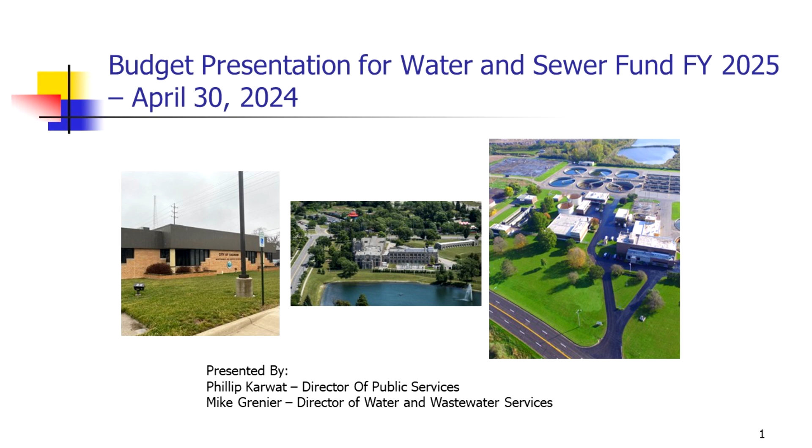Let's start with sewer, Fund 590. Right now we're anticipating revenues of $38,283,207 with corresponding expenditures. These expenditures tie back to our rate study. Everything in this presentation ties back to that rate study. Our spending plans, spend down plans, and capital spending have all been baked into the rate study, so nothing we're talking about today is going to be driving a rate increase.

Just to talk about the treatment plants and the water and sewer services division: the treatment plant has a capacity of 35 million gallons a day. Of that, 7.2 million gallons are in-household, and about 10.3 million gallons is industrial/commercial. Because we're a combined sewer system, we have 7.5 million gallons of stormwater coming into our system, for a total of right around 25 million gallons we're seeing every day.

Besides the sewer treatment plant, we also have 7 retention basins. These RTBs are used to treat stormwater when we have a large rain event, letting us treat it before it hits the river. Otherwise, we don't have the capacity in our treatment plant, which is why we have those. When you have an event with over an inch of rain in a day, you can figure those RTBs are going to be moving.

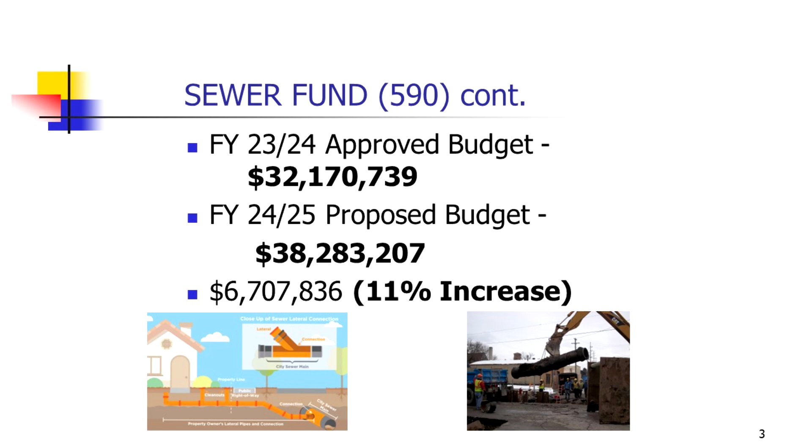Here's your breakdown of the different divisions inside the sewer fund. You're looking at engineering and administration, under Phil Karwat's side of the house, public services; meter maintenance and service, the folks fixing the lines; catch basin cleaning, a whole separate crew cleaning catch basins; and utility billing. On the water and sewer services side, you have administration, that's myself and my group, and process controls, the folks running the computers that actually run our systems.

Treatment and pumping are the folks actually treating the water when it gets to the plant. We have a small asset management division, someone helping us keep track of everything we have and making sure we're taking care of it. Remote facilities are those RTBs I was talking about. The surplus division doesn't have any people, but that's where all the money hides—that's where we do our construction from.

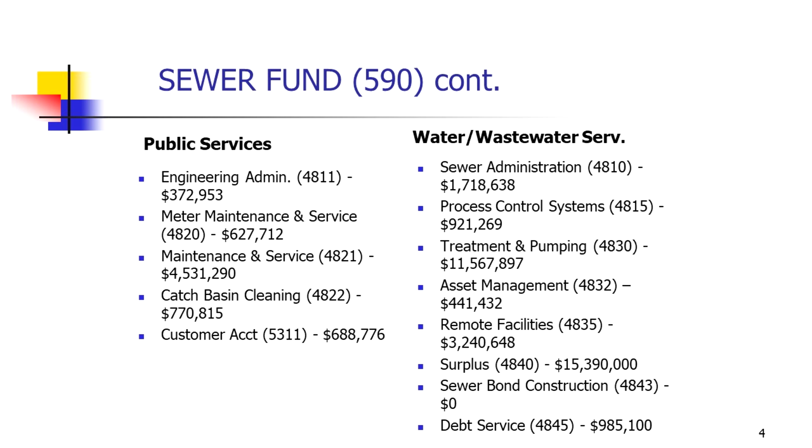A little bit from bonds that we're not using this year, and then we have to spend some money to pay off our bonds, which you'll see on the last one. So there's 13 different divisions. We're all different, but we all work together, whether we like it or not.

We all have to spend out of the same pie, so we're talking a lot. I'm going to walk through a couple of the major purchases, big projects that you're going to see inside the budget. All of this is enumerated out. I'm just going to go ahead and pull forward some of the large stuff. So under vehicles and large equipment purchases, you're at about $350,000 this year.

Most of these monies are all split between water and sewer, so I'm not going to duplicate myself. I'm just going to go ahead and list them here, and then you won't see them again on the water side, but all of these purchases are split 50-50. That's a couple of 3/4 ton pickup trucks, a new dump truck, replacing one of the regular vehicles, a new Cat excavator, a hydraulic sweeper, and a big air compressor. So those are the big ones.

And then through each of the individual divisions, you'd be looking at engineering. They're looking at $20,000 to test materials, to test the asphalt, to make sure the concrete's slumping correct.

Process control right now, most of their big costs are all tied up in supporting the software that we have. So that's contracts for our SCADA system, which is what runs the plant, or the contracts for our software for meter reading, and then some of those software needs.

Meter reading, they're paying a bunch for new meters as they replace their meters, their smart portals. Maintenance and service, it really gets down to parts -- the things they need to make road patches, asphalt, professional services, and then cleaning and televising. Those are some of their large number items.

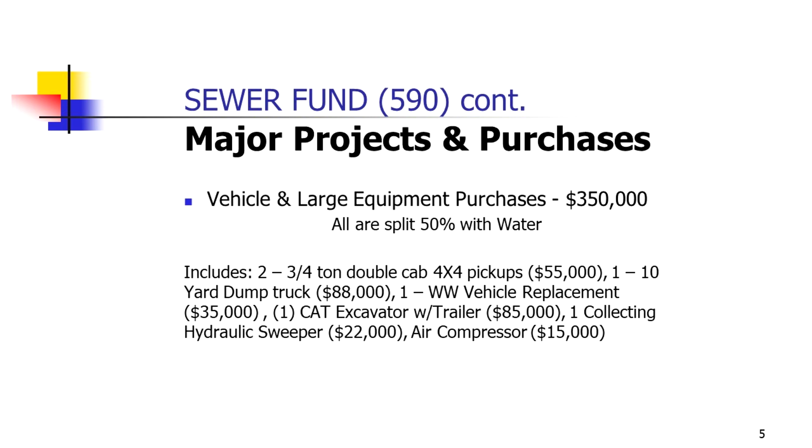I'll talk about some of the sewer projects related to road work. We've got a large project on Jefferson from Hoyt to Janes, a project on Sheridan from Treanor to Hess, 17th Street from Walnut to Janes, South Wheeler Street from West Michigan to Gratiot, Hess Avenue from Jefferson to Sheridan, and then the Adams and Cass Street from Michigan to Niagara.

And this just lists out some of the major road projects. As we're doing these road projects, it's not just us saying, okay, the sewer's fine -- that's replacing all the catch basins, making sure all the appurtenances and other doodads that go on the pipes are replaced, so that we can do this all in one fell swoop and don't have to come back three years later and clean up and poke holes in a nice shiny new road.

Things some of those other divisions are working on through that is they're televising those lines before we do anything with them. Some we just have to line, some we just have to clean, they're fine. But we've got to get out there and know what's going on.

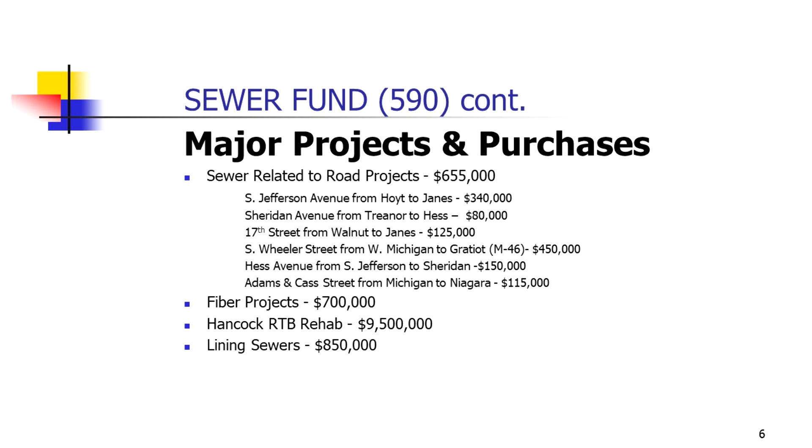Talk about some items that either I want to highlight or things that we're looking down the road, because while this is the FY25 budget, we're looking out 5 to 7 years and even longer than that on what do we need to be doing, how do we need to set the system up to make it better and be smart about using the people of Saginaw's money.

So right now I've got a $400 million state revolving fund ask that was just submitted to the state of Michigan.

We're wondering what will happen if we actually get all that money, because it will put a little bit of push on staff, but it's a risk I'm willing to take. With all these projects coming up and all the different bonding and granting opportunities we have, our capital project list is going to be a little bit fluid right now. I'm not a big fan of ambiguity, but the ability to get free or very reduced cost money from the state or federal government is going to necessitate us being flexible on how we arrange our projects, and I just need you to know that we're looking at all of this.

The other big item on our list is our RTBs. They need work. We've had those evaluated by engineers, and we're going to go deeper dives into that. There's going to be significant work on those remote treatment basins as we move forward.

As I've mentioned, we're seeking funding from congressional earmark requests and the state revolving fund projects. We've retained some consultant engineering firms to help us with those requests. Just to claim one win while we're here, we went ahead and received $500,000 towards planning. We were awarded a planning grant, and you're going to see us use those monies to look at some things on the water side, and we're working hard on the sewer side the same way.

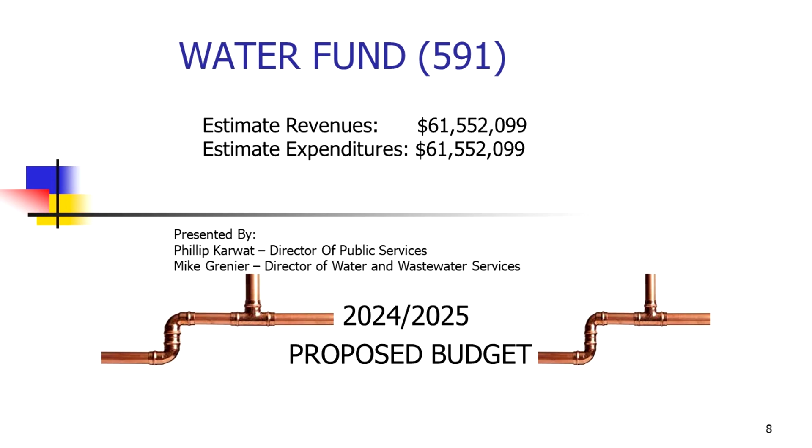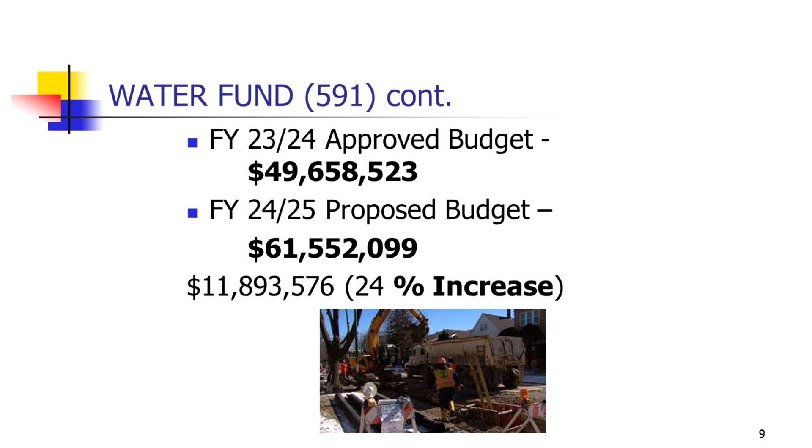Continuing on to the fund again, in FY 23-24 it was just over $49 million. This year we're coming in at 61 - a 24% increase, almost $12 million. But again, this is planned and should not have an impact on rates. We're going to be able to do a lot of capital improvements to the system, which needs it. This is planned, and people have done a good job to make sure this happens.

I'll walk through some of the different divisions inside of the water fund. On the public service side, cross connections - those are the folks doing investigations out in the system to make sure nothing bad is coming in from the pipe side of things. Engineering and administration, meter maintenance - those are the folks putting in new meters, checking meters, making sure we can bill so we can pay for what we have to do. Maintenance and service - those are your folks digging up the pipes, replacing lines.

And then there's our newer division, line replacement. This division is about 6 years old now, and that comes out of a mandate from the state of Michigan that we have to replace every lead service line in the next 20 years.

So we brought on a crew of folks to do that, and over 4,000 lines have already been replaced, either by our crews or contractors. I'll talk a little bit more about lead here in a minute and where we're at on that.

Inside those divisions is our accounting, so customer billing. On the water and wastewater side, you have administration, process controls, those are your computer people. Treatment and pumping, that's your treatment plant. Somebody to keep an eye on the assets. Raw water, that's the money we send up to Whitestone to make sure we've got raw water as part of the water corporation.

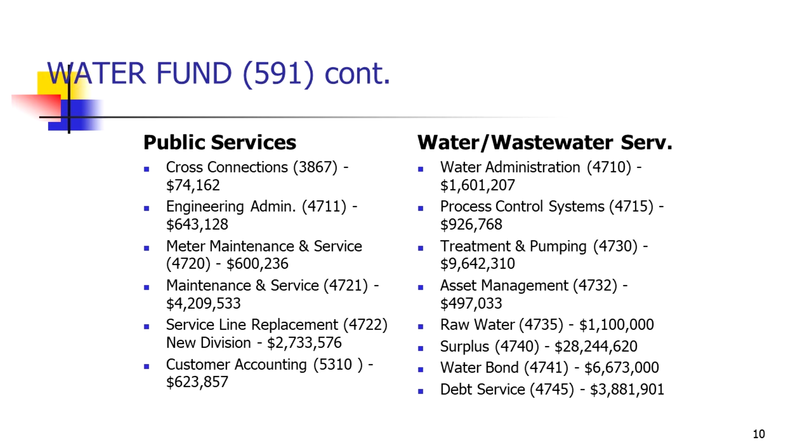Most of the surplus is where the big money's coming out of. It's $28 million this year, and a little bit from bonds and paying off our other bonds.

Let's break down some of the major purchases coming out of the water fund. As I talked about earlier, the purchases you saw on the sewer side are split 50-50. These are the only ones that are not, and that's a new pickup truck for the water plant along with a new mower. The rest are split 50-50 with sewer.

Other major projects are going on, and again you're not going to see me talk a lot about road projects because those are covered at the same time with those sewer projects. Right now I've got almost $35 million worth of capital projects that we're going for. There's a water tower that right now we're estimating at $18 million.

Birch Run parallel pipe, $2.4 million. Improvements at the treatment plant, $1 million. We're getting ready to let the bids out to replace the electrical switch gear at the water treatment plant, which speaks to reliability. That's looking to be right around a $6 million project.

We'll be continuing year 2 of working on the masonry and the roofs at the water treatment plant. It's a beautiful old building, but a beautiful old building needs work, so we've got crews that'll be up there to make sure we're taking care of that.

Along with that, you'll be seeing lead service line work because of the grant we received. That's a 3-year grant for $5 million. It's almost $1.7 million worth of lead service line replacement work that we're doing, and that's contracted work and work that our own crews are doing, and we're able to charge both of those against that grant.

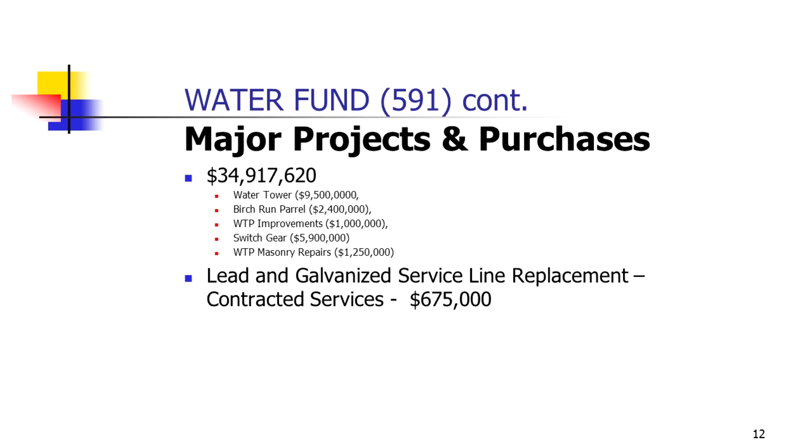Road projects, the water department's going to participate in all of those. Those are listed on the other page as well, so I'm not going to walk you through those, but again it gets into the same thing we're doing on the sewer side. We're making sure the hydrants are replaced, all the valve boxes get replaced, so that when we're done with the road, we're done with the road. That's a big focus of the department.

It helps save everybody a lot of money that way.

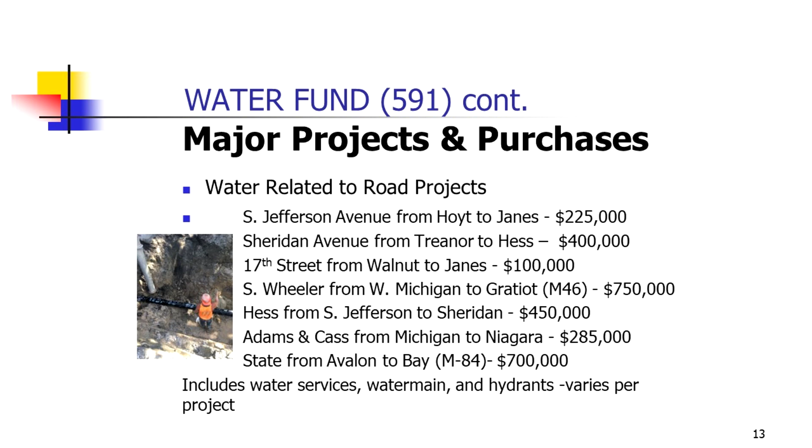I'd like to talk a little bit about the lead service lines. Council will be receiving a report here in the next month or so on where we are and a big breakdown of our lead service lines. I'm not going to go too deep into it, but after the Flint water crisis, the state of Michigan mandated that we replace all our lead service lines. Right now we're estimating that to be a total cost of $50 million.

So far we've received $5 million from the state revolving fund to help replace those, along with the funds from that $6 service charge on everybody's bill. As we receive those funds, we're actively seeking more money. We're asking for another 3 years on that SRF loan right now. As we can stack those monies, we'll try to replace more service lines.

The other thing we have to do as part of this work is inventory our lines. Saginaw did something I think was a really good idea. There are two ways to catalog your service lines. You can do a sample and then a tighter estimate, or you can go out and pothole every service line in your city and know exactly what's in the ground. That's what Saginaw chose to do a couple years ago, and it's paying off for us.

Right now, the Maintenance and Service Division has identified 4,633 lead service lines, over 20,000 non-lead service lines, and that only leaves us 3,000 service lines to verify before October. October of '24 is our deadline to have that inventory completed.

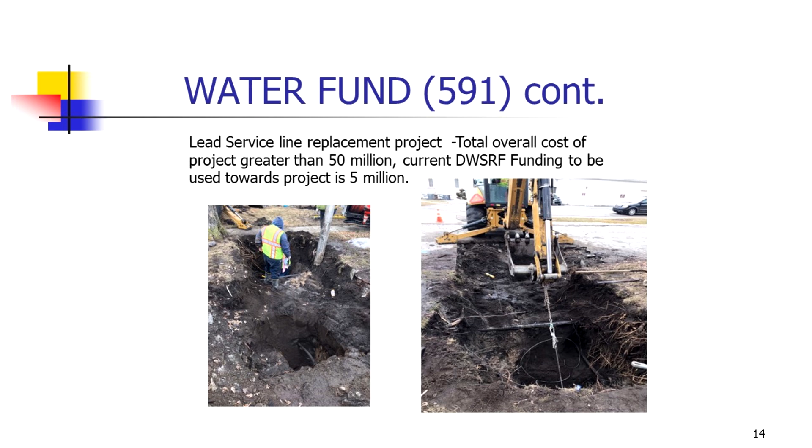A little bit of what's going on at the treatment plant. One of the big studies going on there was to optimize how well we're treating. Are we treating for lead the right way we're supposed to? Right now there's a loop study going on where we dug out lead service lines from our system that have been exposed to our water. Those are now mounted inside the treatment plant, and we're running different treatment chemicals through those service lines. This is part of a $200,000 study we entered into with Fishbeck Engineering to look at that.

Are we doing the right thing for treatment? This study is going to take at least another year to complete, but that's one of the things we're studying. We received that $500,000 grant that's going to help us study what the future of the treatment plant should look like. A big, beautiful old building, but it's time for some work. What should we be working on? Which direction should we be going?

We need to provide a little more service going west to our service area. How do we go about that? What's the best way for us to do that? We're due for a reliability study, so we're going to have that taken care of out of this grant. And then, like any good engineering firm, we were able to score money to look for more money.

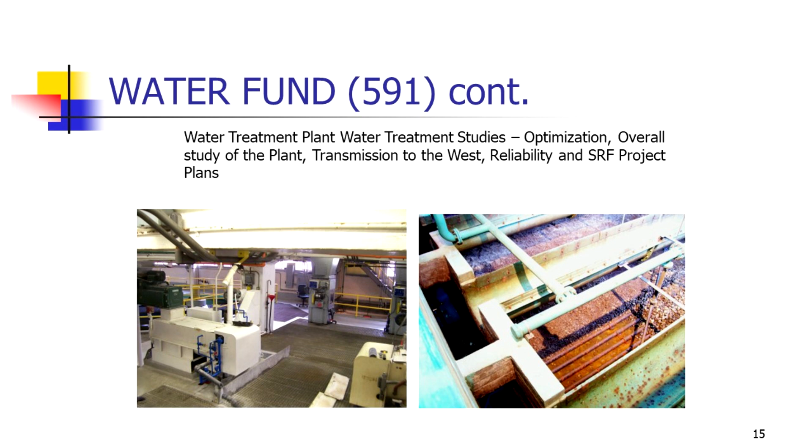The big project on tap for this year is currently out for bid. We had our first pre-bid meeting last week. There are primarily two tank companies in the country, and both were here to bid on this job. We're estimating that water tower is going to come in at $18.5 million, and we're going to be building a 3 million gallon tank.

We'll get a lot of questions on, well, why do you need a tank now? You've been running for almost 100 years without one. It's because stuff happens.

And then particularly with the electrical deregulation that's coming down the pipe, we're losing the big power plants. So if you have distributed generation, you'll also have distributed risk. Right now we've got 5 minutes, 8 minutes, 2 minutes, depending on how much water we're pumping that day, to get our backup generation on if we lose power.

By putting in this tank, we'll basically buy ourselves 2 to 3 hours. If you lose pumping, which is the case right now, you'd have those 2 to 5 minutes before you have to go into a boil water notice. By building this elevated tank, it buys you, me, and my staff the time we need to figure out what's going on so we're not in that situation.

We received $15 million from the state revolving funds as forgivable loans, which means free money for us to go ahead and build this tower, with the remaining funds to be taken out of surplus.

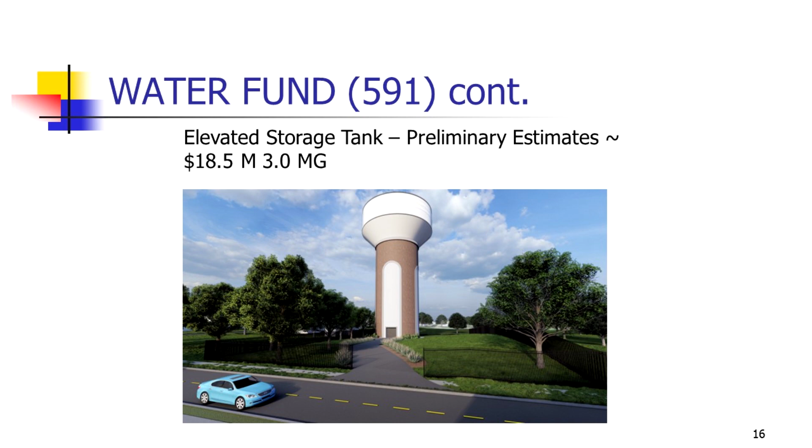Just some pictures of some of the things we're up to. As I said, this was the end of phase 1 of the work at the treatment plant, so you saw a lot of scaffolding around. That was actually to protect people because some of the bricks were loose and falling. But they were able to get up there and do all that masonry replacement work with the correct type of mortars so we can keep this building around for a while.

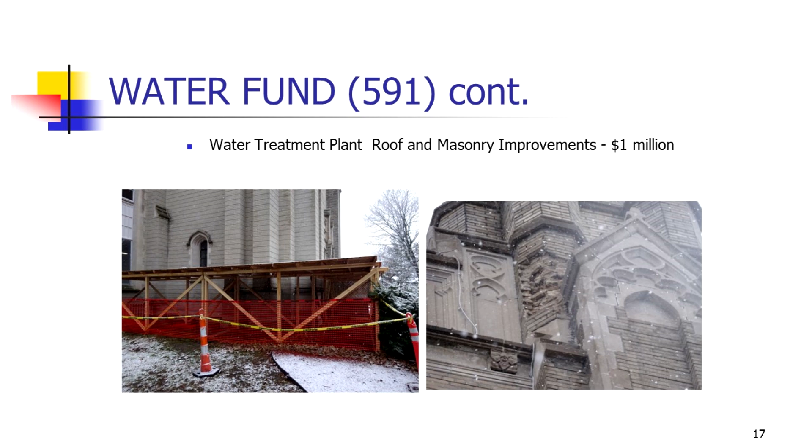So we're into phase 2. That's another $1 million, plus we'll be looking at a new roof on some of the facility as well.

Some future projects for you guys to be aware of. We'll be looking at our raw water transmission. That's probably the weakest point in the treatment system, after the tower. There's a section coming down from Whitestone that only has one pipe, and if you have one point of failure, that's not necessarily the best thing in the world. We'll be looking at what we want to do with that - is that putting in another line, or rearranging some things and borrowing a different line? We'll have a study going out on that.

We'll also look at our finished water transmission, since those two kind of correlate together. And we're going to be looking at the treatment plant itself - it's been in service for 95 years. What do we need to do for it, and what puts Saginaw in the best position going forward with their drinking water. There's also some other things, distribution improvements and lead service line improvements.

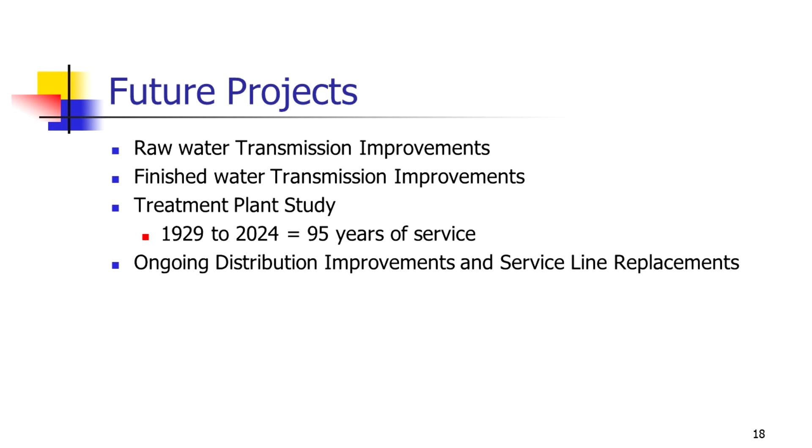Just to talk a bit about how we actually decide what to tell you we need to spend money on - it gets down to level of service. How old are our assets? What is a failure rate that's acceptable? Do we have redundancy? When I talk about that single raw service line, or about building that water tower, those are things that build redundancy for us.

Because my whole goal in life, your goal as a council, and the good people of Saginaw's goal, is that you turn on the tap, water always comes out, you flush the toilet, it always goes away. So that's what we're always focused on - pressurizing and protecting the system, which gets into pressures, chlorine residuals, and cross-connection inspections. Those are things we do because we have to protect the water system. And then every decision we make is viewed through a funding lens.

Everyone that works in our system, and everybody here on this council, is very well aware that anything we do to water rates impacts our customers. So we're looking at costs - is that benefit we get worth the cost? We just took one of those items off the table that way.

We had been looking at maybe adding a second sewer line across the river. Well, we looked at the cost-benefit ratios on that, and right now it's not looking like we want to do it that way. We may want to look at doing it a different way - we're going to have a study on that to see if we can find a way to skin that cat that doesn't cost us $30 million. But we're always focused on the impact on rates, and when we have our studies, we spend according to those studies.